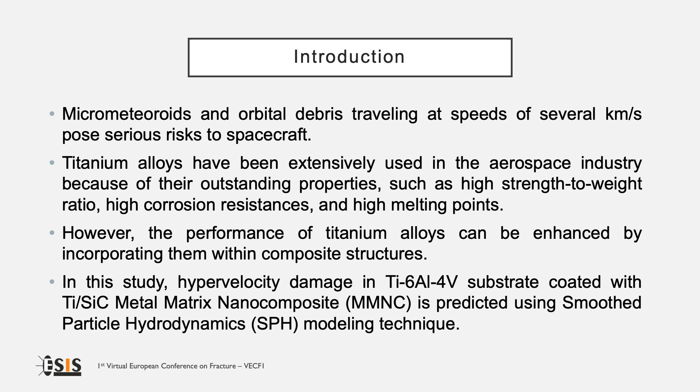Impact resistance has been widely studied in the literature. Schonberg, in 1990, found that the extent of damage to a dual-wall composite structure depends on the material properties of both the projectile and the structure. Several authors developed numerical models based on the SPH technique to simulate fragmentation of metals when subjected to hypervelocity impact.

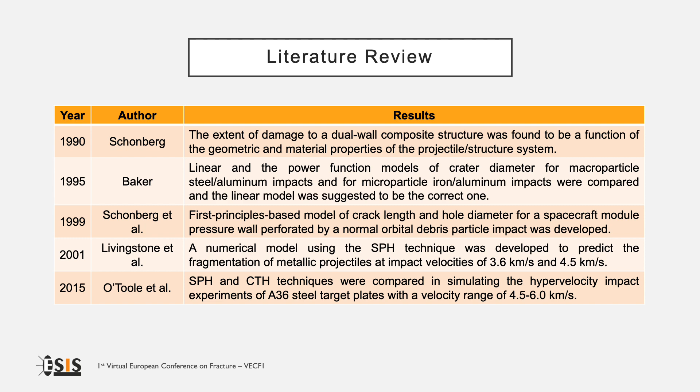Zhang et al. found that titanium silicon carbide metal matrix nanocomposite coating exhibited double hardness with respect to the titanium 6-4 substrate and decreased the friction coefficient. Consequently, wear rate was reduced by 78%. The authors themselves performed hypervelocity impact tests on coated titanium 6-4 and found improved impact resistance.

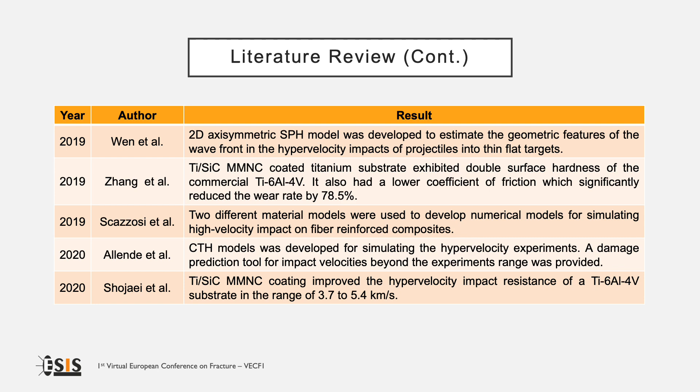The aim of this work was developing a numerical model for predicting failure of the titanium silicon carbide metal matrix nanocomposite, exploiting the SPH technique. The results of the hypervelocity impact test already performed by the authors in the earlier study are exploited in this work. Using selective laser melting, a titanium silicon carbide metal matrix nanocomposite coating with a thickness of 200 microns was deposited on a titanium 6-4 substrate.

In this study, parametric studies were performed to assess the influence of the material model input parameters on the shape of the crater generated by the projectile. In this way, it was possible to better understand the phenomenon and increase the accuracy of the numerical model.

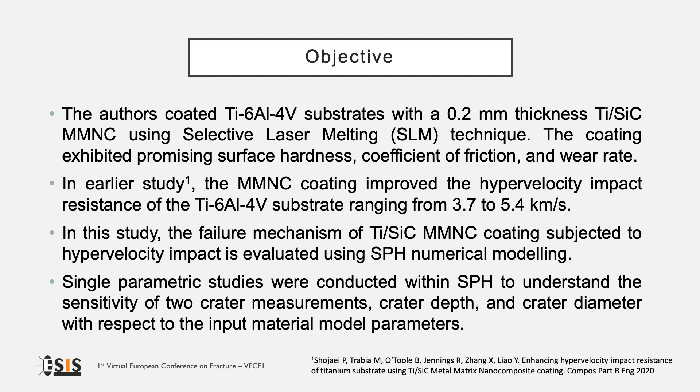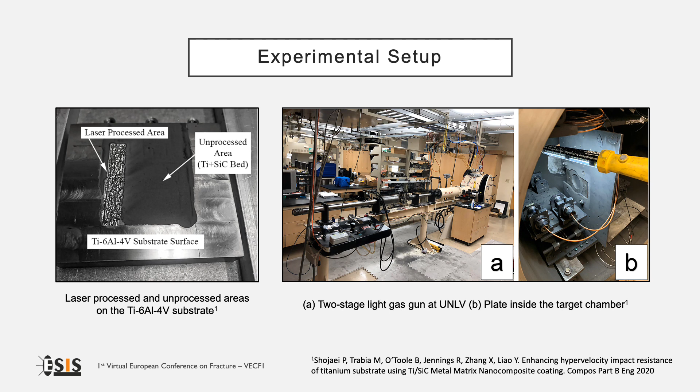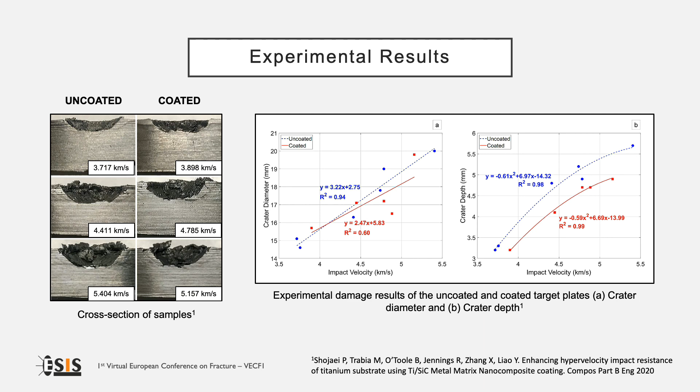The numerical model was developed in the software LS-DYNA version R11. An axisymmetric model was preferred over a three-dimensional model to save computational time while keeping acceptable accuracy. The smoothed particle hydrodynamics technique was used for the discretization of the three parts of the numerical model, which were the projectile, the coating, and the substrate.

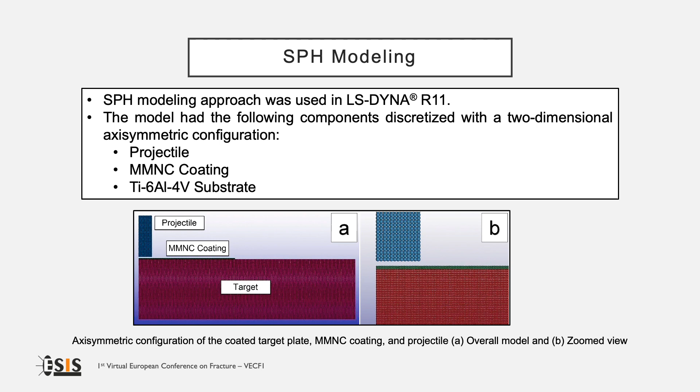No boundary conditions were applied to the edges of the target, since it is a hypervelocity impact and the results are not dependent on the condition far from the impact region. Three different models were developed with different particle spacing. The final choice was the one displayed in the figure on the right, which had better accuracy in the prediction of the experimental results. The Johnson-Cook material model was used for the simulation of the material response of the Lexan projectile and the titanium 6-4 substrate.

This material model takes into account strain hardening, strain rate hardening, and thermal softening of the material. It is therefore well suited for the simulation of the material response under the condition of hypervelocity impact, where there are high strain rates and local heating.

In particular, this material model is based on an element erosion criterion which deletes the element once the strain is higher than the maximum equivalent plastic strain, which is defined by the user.

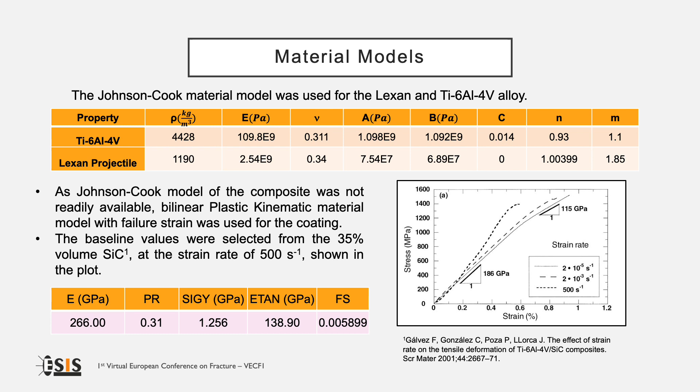The results of the simulation are reported in this slide. The Lexan projectile is completely destroyed during the impact, while the damage on the target is localized in the impact region. Upon impact of the projectile, a compression wave starts propagating in both the axial and radial direction. At 0.4 microseconds, most of the titanium silicon carbide coating particles are eroded. At 0.6 microseconds, a crater starts to form. As the impact progresses, a bulge is forming on the backside of the target.

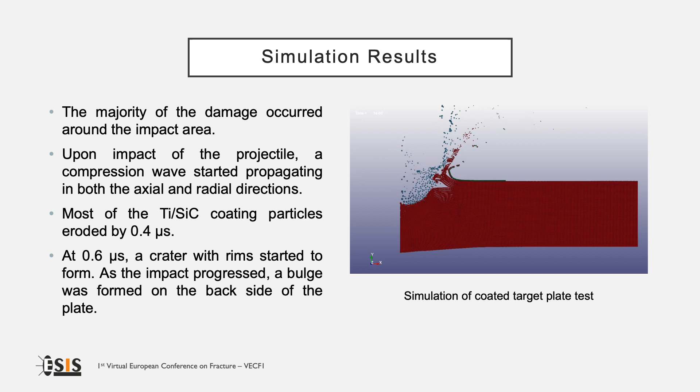A parametric study was performed by varying each single input parameter in the range between -10 and +10%. The crater volume was computed using the formula displayed in the slide, and thus also the error with respect to experimental data was calculated. It was found that if the elastic modulus increases, the crater volume increases, and thus the error. This consideration is also valid for the Poisson ratio, the yield strength, and the tangent modulus. Instead, if the failure strain increases, the crater volume decreases, and thus the error.

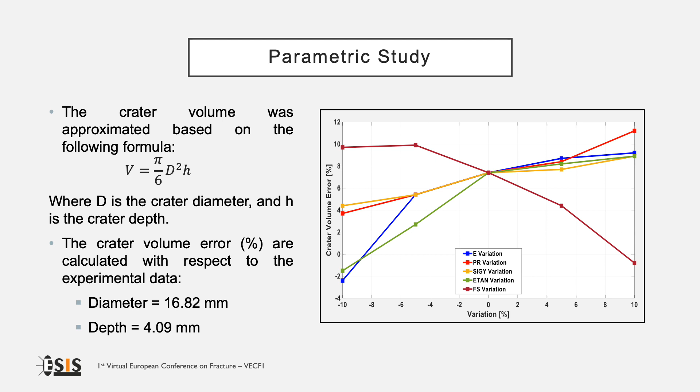The same results are here reported in a table. If we consider the baseline set of input parameters, the error is 7%. If we take into consideration the elastic modulus, the Poisson ratio, the yield strength, or the tangent modulus, we obtain the least error by decreasing this input parameter by 10%. On the other hand, if we consider the failure strain, we obtain the least error by increasing the parameter by 10%. This is also the configuration with the least error, which is lower than 1%. On the other hand, the highest error is obtained by increasing the Poisson ratio by 10%, obtaining an error of 11%.

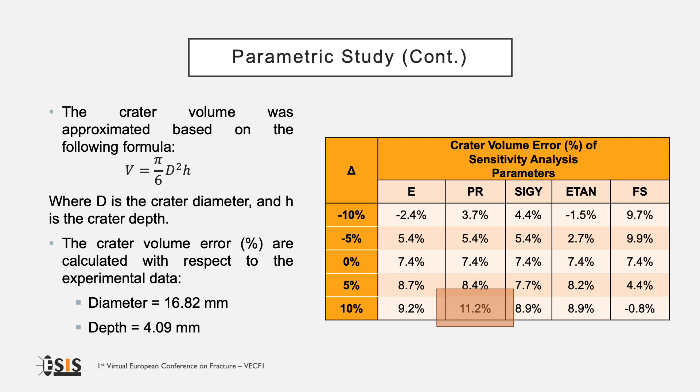The previous results were obtained for an intermediate impact velocity. We can consider the set of parameters with the least error, so the one with the elastic modulus, Poisson ratio, yield strength, and tangent modulus decreased by 10%, or with the failure strain increased by 10%, and evaluate the error by changing the impact velocity. As shown in the diagram on the right, the error increases if the impact velocity increases.

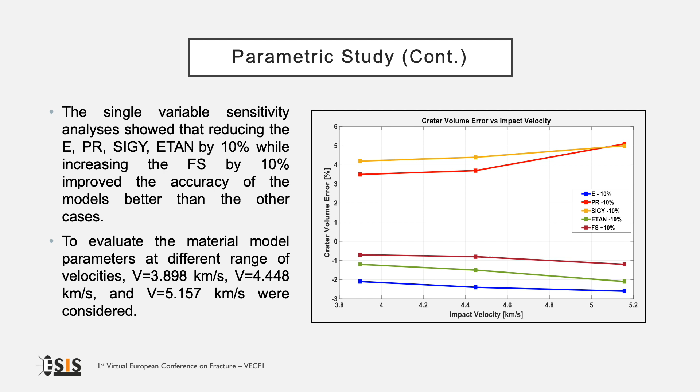The same results are here reported in a table. Also, another set of parameters is considered, reducing the elastic modulus, the Poisson ratio, the yield strength, and the tangent modulus by 10%, while increasing the failure strain by 10% at the same time. This new set of parameters leads to a very small error, but again, the least error is obtained by only increasing the failure strain by 10%.

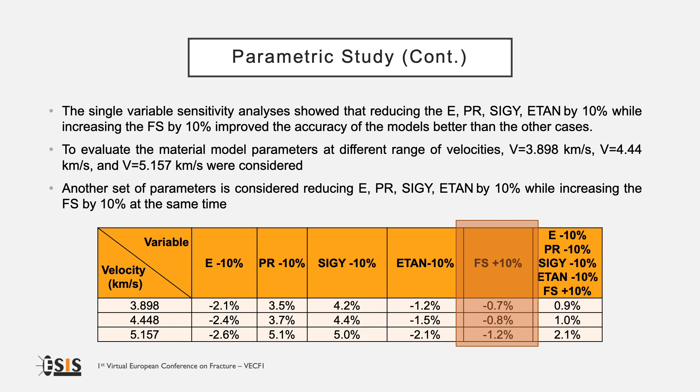The results of the parametric study are finally summarized in this slide. The best set of input parameters is obtained by keeping the baseline values of the elastic modulus, the Poisson ratio, the yield strength, and the tangent modulus, and by increasing the value of the failure strain by 10%. This set of parameters leads to a very low error on the crater volume. This error is below 1% for all the impact velocities except for the highest one, where it is 1.2%. The variation of the error between the worst and the best configuration is 0.5%.

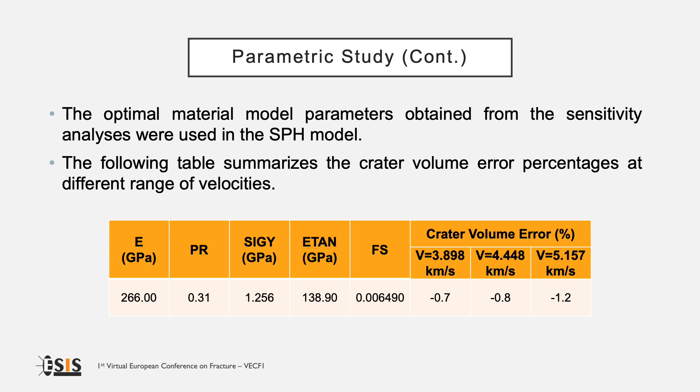The conclusions of the work are reported in this slide. The failure mechanism of a titanium silicon carbide metal matrix nanocomposite coating subjected to hypervelocity impact was shown. The sensitivity analysis was performed starting from the parameters of the titanium silicon carbide metal matrix nanocomposite coating with 35% volume silicon carbide. It was shown that by increasing the failure strain by 10% while keeping constant all the other input parameters, the accuracy of the numerical model was improved. And finally, the usage of a bilinear material model for the metal matrix nanocomposite coating was justified.